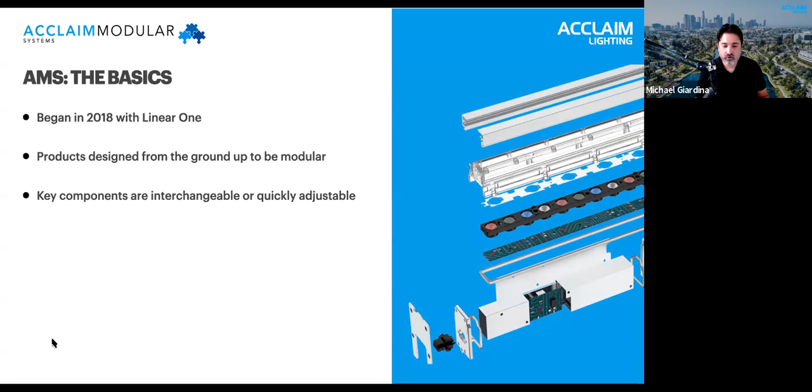The modular platform requires that key components be completely interchangeable or quickly adjustable. Any AMS fixture will have this element as one of its biggest features.

By doing this, we can offer many more product options that may not have been possible previously. These include color temperature options, optics, and mounting options. As an example, our previous linear series, Dynagraze and Cove, only had 6 beam angles in total, whereas its replacement, Linear One, has double that number of available optics.

To be clear, our primary objective with AMS is to build and ship fixtures for nearly any size project within days, not months. Since launching Linear One, we have reduced the ship time to our clients by 85% with fixtures built on the Linear One platform. So ultimately, this project is here to benefit you, the clients, and ensure we are providing the best lead time that we possibly can.

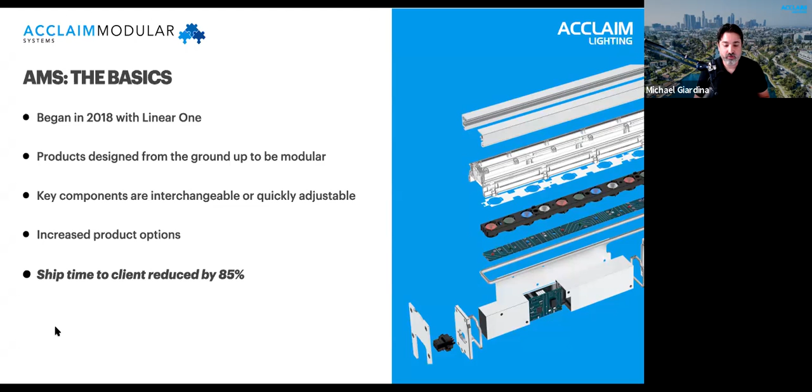I like your backdrop, Michael. Finished production live in LA, Echo Park. Right. So moving on, that was the basics.

Moving on to why modular. Why did we choose modular as the basis for this system?

The first thing we considered with AMS is how we as a company can have better control over the options and features that we offer. A key hang-up on some designs is that we may have some, but not all, of the components needed to provide all the options we want to put on a fixture.

As an example, with Linear One, there wasn't an optic available on the market that could provide all 12 of the beam angles we wanted to offer. But by making that system modular and customizable on a single optic with high transmission filters, we were able to get that done.

Next, we know everyone has different needs for the same fixture, so we want to ensure the options we offer are practical and useful in many different applications. At the end of the day, we still need to be able to sell these options, so we have to know what's popular on the market and keep an eye on what may be popular in the future.

When we build on the AMS platform, we can make those adjustments and come to market relatively quickly.

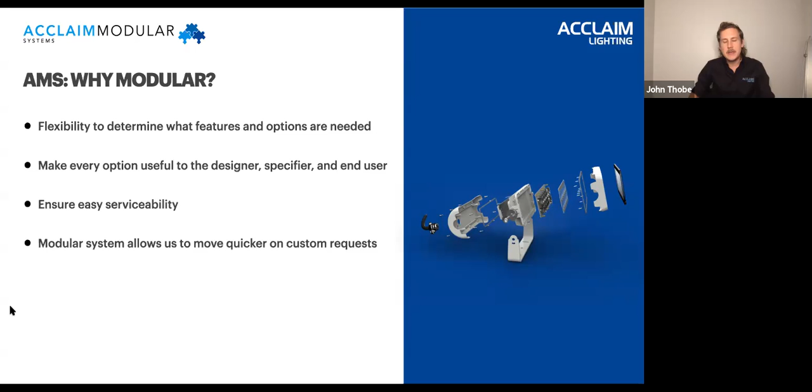Michael, wouldn't you say this is where the universal bin comes in as well, and the service component? With the modular system, we're always able to ensure a replacement fixture's LED will match what was previously shipped 3 years ago. Or we can service the module, removing the LED components and putting them on a new power supply base component. The whole idea of having the stackable assembly allows us to interchange any of the parts on a service level and on a production level.

Yeah, that's correct. What John's talking about there is our bin one feature for linear one, which means that over the lifetime of our linear one fixtures, we are only going to be using a single bin per device. So we can swap that unit out 6 months after if it needs a repair, and it'll give you the same color consistency with the units you already have on site.

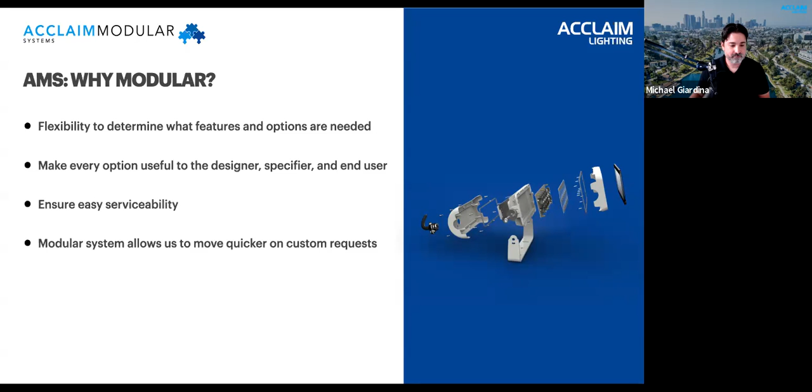That was the basis for why we switched to modular. So here's the section where we talk about how AMS actually makes things happen faster in the real world. First off, the majority of our AMS assemblies are toolless, meaning one of our techs can create it in seconds without having to fuss with too many screws or separate assemblies. This is really beneficial on the production line because they can move through it relatively quickly without needing to grab this tool and that tool as they're assembling them.

Second, as I mentioned earlier, when dealing with beam options, we use quick swap light shaping filters that provide up to 92% light transmission. These assemblies are also generally toolless for quick installation right into the light. We partner with a company here in Torrance called Luminit, and they provide most of our light shaping filters. Both of those systems make it easy for our LA assembly team to turn around orders quickly, generally within 10 days, no matter the configuration.

That is really the key here. While quick ship programs are helpful, they don't always work when you need the less popular optic or the less popular color temperature. So AMS solves this completely and makes every option available in a timely manner.

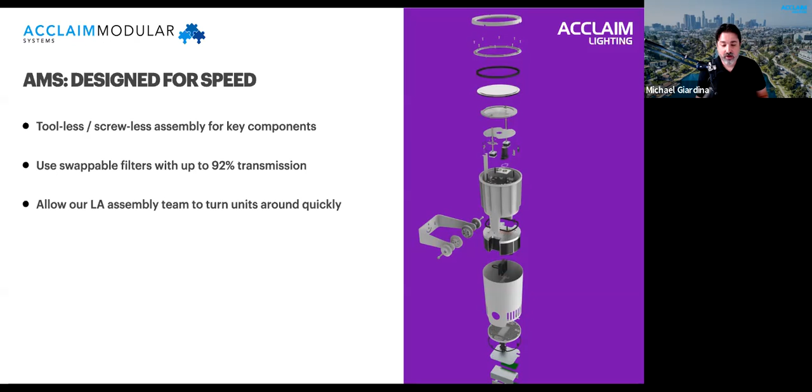In addition to these more traditional assemblies, where we are putting the component puzzle pieces together, we have been working on a new breed of AMS fixtures that have user adjustable options with everything built into a single fixture. We'll show you some of these new designs shortly, but know this type of AMS fixture can be delivered even more rapidly as it does not need to go through a traditional assembly process at all, but can provide you with all the options that you need.

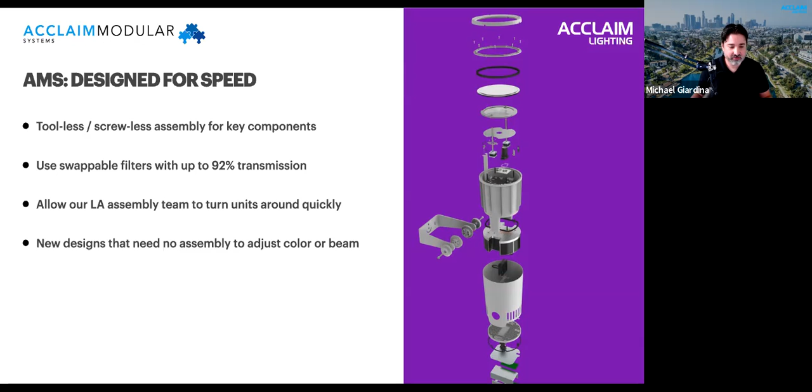So that's kind of a primer for AMS, what it is and how we can utilize it. Now we're going to go into the specific anatomy of an AMS fixture. This can vary from fixture to fixture in terms of the exact options, but note this is generally consistent as a concept for all the AMS fixtures.

So we're looking at an exploded view of linear one. First we have the core kit. The core kit is the main housing, and it includes the connections to the external cables for power and control, an internal 100 to 277 volt transformer, and in the case of linear one, 0 to 10 volt dimming circuitry. So all that is housed in the core kit, and it is the primary assembly of an AMS system.

Next, we have the color kit. Typically the color kit is going to be the LED PCB in the color temperature that you want. Now, sometimes this includes the narrow native optic already installed, but in the case of linear one, it's simply the LEDs on a custom graphite board. And that's the color kit.

And lastly, we have the optic kit. The optic kit is that high transmission light shaping filter we previously touched on. In the case of linear one, it also includes the narrow 10-degree optics that the filter sits on top of. So these three assemblies are what make up an AMS system.

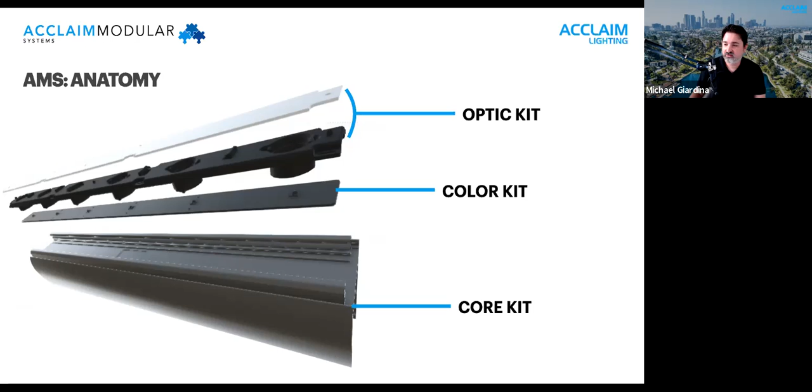Core kits, and I'm going to kick it over to John here. He can show you each of these in person. All right, so you guys can see this is the fully assembled outdoor fixture. What Michael's talking about component-wise...

This is the flexible graphite PCB. You guys can see it's actually pretty slick. Because it's graphite, it does direct heat transfer into the body of the base unit, the core kit. This is part of that toolless assembly that Mike was talking about. So all it has to be, it's held in by compression. There's none of that weird LED glue stuff on the back of the board. Again, that's how these fixtures are component interchangeable.

Here's a really good example, kind of a close-up of that optic kit. You can see we have the base collimator, kind of that traditional format for LED. And then this is the Luminit film. It is a pure holographic plastic, and that's how we do our redistribution of optics.

And it's kind of hard to get an angle there, but what it does is it's prismatic plastic, so it does a clean redistribution of the base beam angle. Again, everything kind of stacks up.

You can see these little rubber bumper pads. That's the compression that holds everything down, stacks like Legos. The top lens is fitted on, and it holds everything in place.

Same time, just so you know, with these linear fixtures, a lot of times we'll be using glare shields or louver components. If those are ordered or part of a specification, this is another great feature - they come installed on the fixtures. So when we're opening these things up, we're able to replace a traditional edge and install the glare shield, and repackage the fixture ready to be installed. No additional work needed on site.

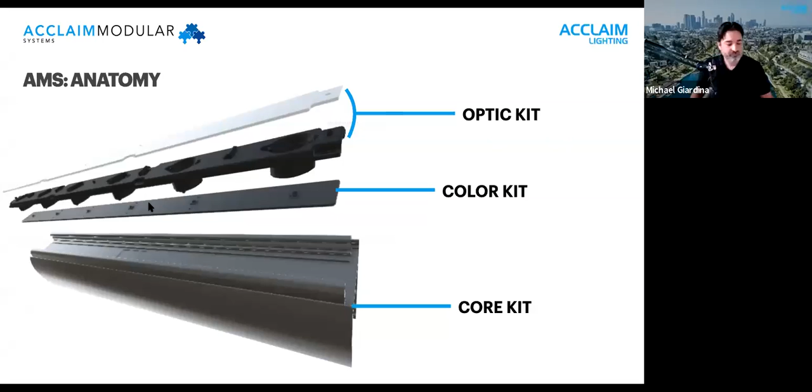Thanks, John. No problem. All right, so let's take this concept and look at it on a different fixture.

So we're looking at Flood 1, our newer compact affordable floodlight. You can see here that the core kit would be fully assembled, so nothing on the core kit needs to change here - that's the back portion of the fixture. The color kit offers 4 color temperatures, and you can see that the color kit includes the native optic as well. Sometimes the native optic is part of the color kit, sometimes it's not.

The optic kit is simply a placeholder here for the light shaping filter. You can see that as a narrow little section there. All our assembly team needs to do is slide the filter into that, and it's ready to go on top of the color kit. So you can see how the same basic AMS principles apply to these different fixture styles, from a linear fixture to a floodlight to our downlight systems. It can apply across all those.

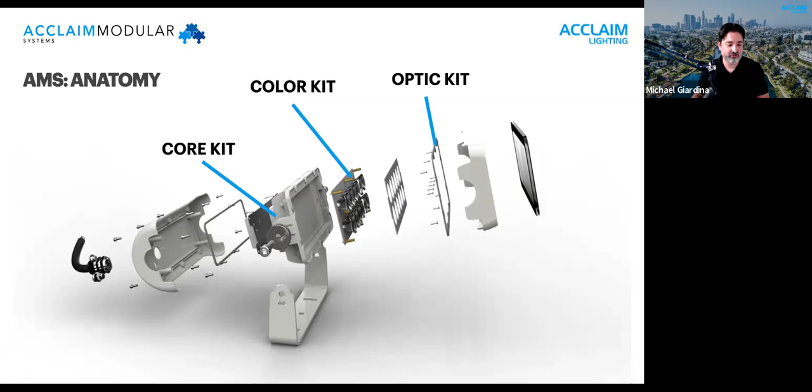So we said a toolless based AMS fixture can be assembled very quickly, and now I'd like to show you how fast that actually is. You can see this linear 1 unit can be assembled in less than a minute here. Let me get the video going.

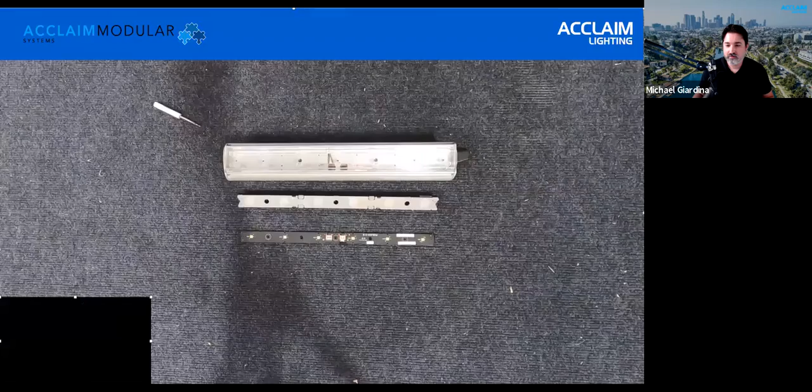That's an interior model, right, Michael? Interior model, yes.

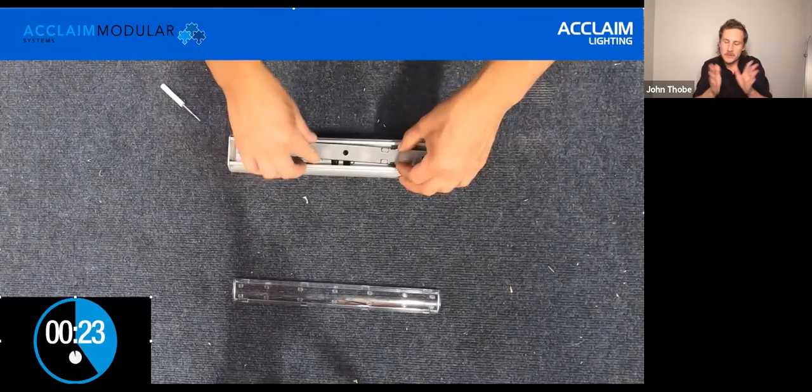I know some of the questions that come up often about this stuff is, can you change it in the field, Michael? For the interior fixture, say if I didn't like the optic that I bought, and needed something narrower, or had some striation off the LED board and wanted something a little softer - what would be the process of getting that adjusted? I would say consult our support team for that on a case-by-case basis, but technically it should be doable. I'd suggest getting our support team involved just to make sure they're doing it right.

Okay, yeah, there are instructions. My feeling on this is if it's interior, we're not dealing with any weather seals. You can see in the video, that was done in 40, 45 seconds, where the lens is physically popped off and just held via compression clip-in base on the base of the fixture.

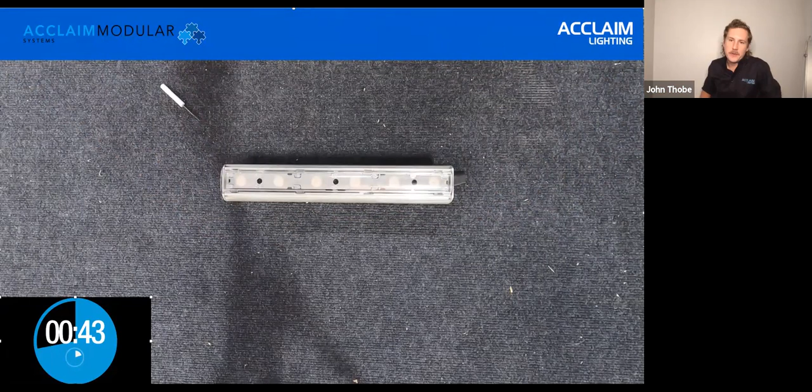Right, and definitely the interior version is best case scenario here. With the exterior version, we have a couple of different screws involved as well to make sure that the IP66 rating is intact, so that does take a little longer, but it's more about showing you literally how fast we can do the assembly with these systems. Special thank you to Jerry on our team for being the hand model on that video.

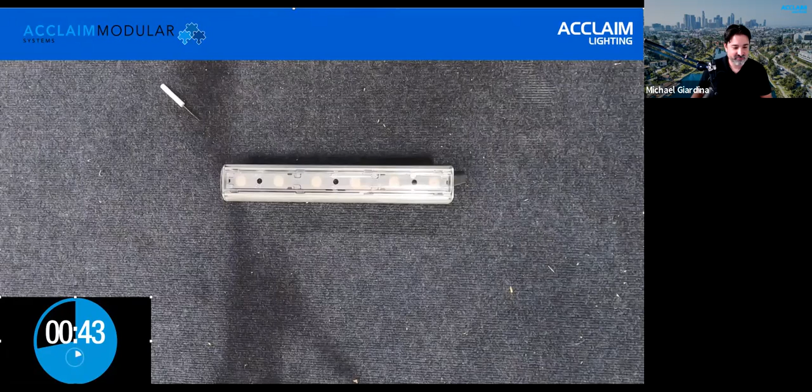So one other thing I want to show you - we've talked a lot about options, but I want to show you how you can see all the available options for a fixture and build a custom spec sheet on our website. If you go to any product page on our website, you'll go down to the configure your product section.

So you can note up the top left is the order code with some hashtags there for the blank areas. You can select your version - this is the 12 watt per foot version. Select your length in a linear fixture, 1 foot or 4 foot. Select your LED color, 80 CRI, 3500K, and move over one more, and you've got all your optic options. Select the one you want. Now if you notice back on the top left, you've got the order code filled in. You can either copy that to the clipboard or generate a custom spec sheet, filling in a little bit of information about the project.

And that is all optional, by the way. You don't have to fill in that information. Then click generate, and you'll get a custom PDF with all the information on the project you filled in. If you scroll to the specification area with the order code, it fills in the information for the exact fixture you're looking for. That's an easy way to view the options for a product and create a custom spec sheet as you need it on our website, available for all fixtures that have options like that.

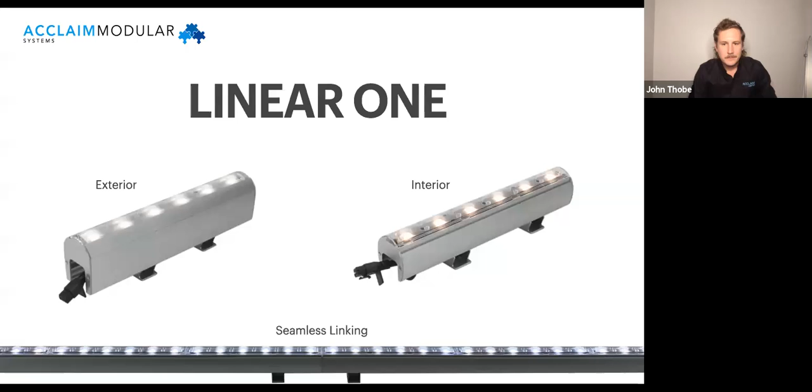Linear One offers 10 static colors with an 80 or 90 CRI. We recently launched some warmer colors, 2100K and 2400K, for the hospitality markets. You can also get a few static colors like red, green, blue, or amber. We have 12 different optics to cover any linear application, including asymmetric and batwing.

The dimming is also class leading, down to 1% via 0 to 10 volt. All the way down to 1% there - this dimmer clicks off, and you can see it clicks right back onto the base. So you get a really nice, clean dimming curve on 0 to 10 with this fixture.

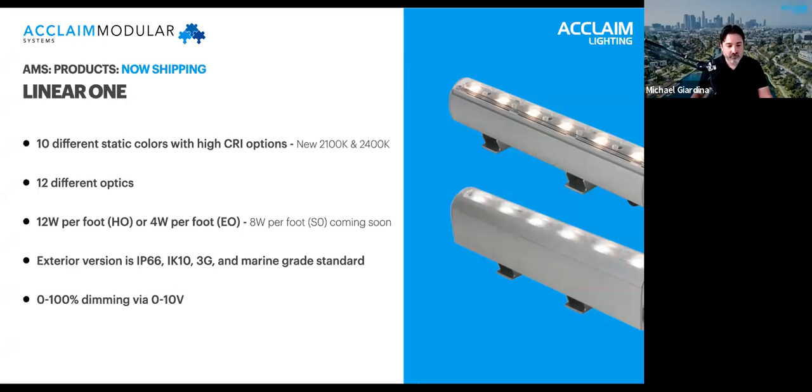All right, so that's the basis of our white light Linear One. Now what we'd like to talk about, and we're very excited to show you, is the newest part of the Linear One line: Linear One DMX. Linear One DMX, which will be coming out in the third quarter, will bring all the advantages of the AMS platform to color changing and dynamic white fixtures.

We will offer RGBW with 3 options on white: a 3000K RGBW, a 4000K RGBW, and a 5700K RGBW. It will also include a dynamic white option that will operate from 2400K to 5700K, with 10 linear optics, all similar in performance to the white LED Linear One version, and we're up to 600 lumens per foot. So all the same durability and benefits of Linear One, but with the DMX version.

This will be kind of taking the place of our Dyna Graze DMX series in our line, but because we're adding that modularity, we think we're going to do really well with this product, and everyone's going to be excited about seeing it.

So John has a unit there. In general, I think of this as a first of its kind variety - we're launching quick ship, high performance color changing linear. As Michael mentioned, you could specify 3 different formats of RGBW: the 3K, the 4K, or the cool white, an RGBA, or a dynamic white. So that's 5 different chipsets that we offer as standard, plus 10 different optics.

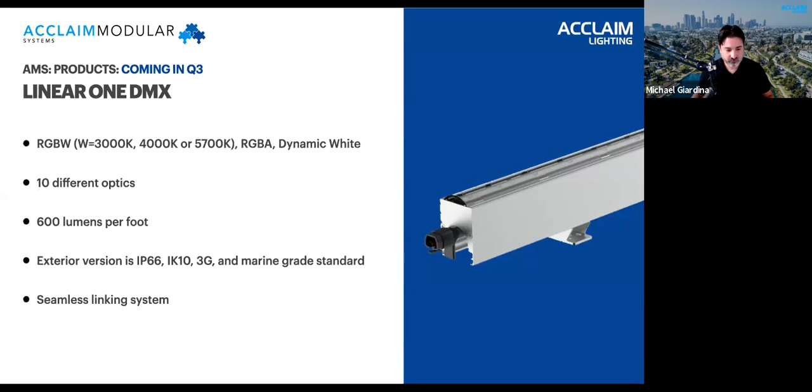So that's Linear One DMX. Moving on to our floodlights on AMS. Introduced last year, Flood One EO is a compact, affordable LED floodlight. It's the first floodlight built on the AMS platform. It features 4 static color white temperatures and 6 different optics, giving up to 80 feet of throw in its most narrow optic. It bests the DynaFlood HO, which is the unit it's replacing, with 25% more output. It features better durability, including an IP66 rating and 3G vibration for bridge applications.

Awesome, I've got the fixture here - again, you can see that's the narrow 10-degree beam. Great thing about this fixture, for just a simple traditional white floodlight, is it's operating on 2 wires 0 to 10, so we got a really nice dimming curve down to about 5%. Great performance with twist and lock adjustable aiming. And again, with the modular system, any color temperature, multiple CRIs, all the beam angles - there's no real lead time for this fixture. We're stocking the core kits and components here, ready to assemble and ship.

Bam. And you can see this is a bright light, really punchy.

Absolutely. So again, expanding on taking these fixtures that we've introduced first with AMS in white light and bringing them over to color, we are also happy to introduce Flood One EO Color. We wanted to show all these products to you at the most recent trade shows - obviously we didn't get a chance to do that. So we're showing them to you as best we can here, but we do look forward to showing them to you in person the next time we get a chance.

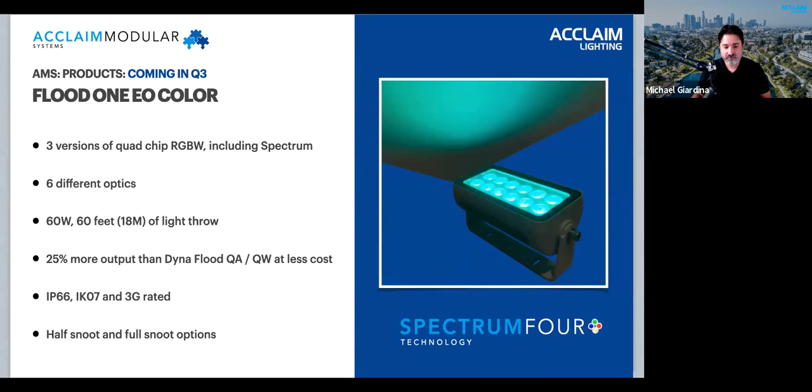Taking the Flood One EO concept and completing the series is Flood One EO Color. It will offer 3 quad color configurations, including the Spectrum 4, which provides better dedicated whites as well as a wider color palette. The quad color system, as you can tell from the photo, provides color mixing in a single die, which eliminates the striation and unwanted shadowing when mixing 2 or more colors together. We've had this on products for a while - our Dynadrum series in quad does this - and it's just a much better system for color mixing.

You guys can see it, just switch here real quick. I've got the fixture doing a magenta tonality. I mean, this thing is right on the wall.

You cannot see a red diode, blue diode, or any color variation. We are mixing right on the chip, right at the source, taking the technology we've offered in larger, higher performance fixtures and narrowing it back into a simple color changing floodlight where we can do all the colors built into one. Make it go white, looks like a white light. For Christmas time, we can do holidays at the ready.

So Flood 1, the white version we talked about, had about 80 feet of throw in its narrow optic. This color version can get you about 60 feet of throw in a very compact package, with all the same durability features that the standard Flood 1 EO has.

This product is the successor to our very popular Dynaflood QA/QW fixture. We expect it to make its mark by offering 25% more output than the Flood QA/QW, and it's going to come in at a lower price point. So we're really hitting 2 birds with 1 stone there.

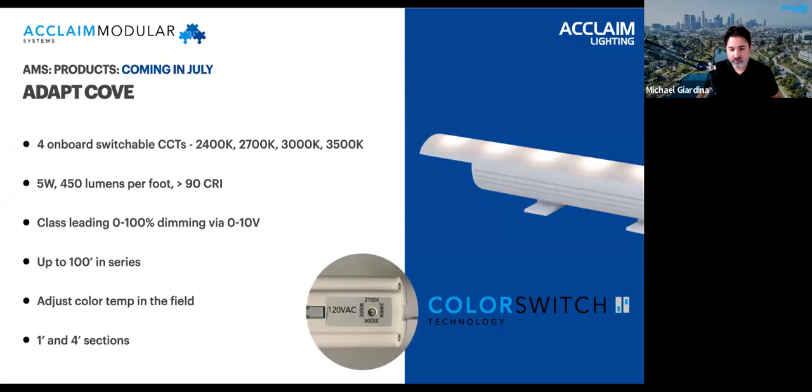Moving on to one other new product that we are introducing. This one's due out later this year, but it features 2 new technologies from Acclaim.

First, let me introduce you to what Spectrum 6 technology is. Spectrum 6 takes our concept of better white light and color changing products to a new level. While our current Spectrum 4 products do an excellent job at providing good dedicated whites, it tops out at about 80 CRI with the RGBW chip.

With Spectrum 6, we combine 6 separate colors in a single array to provide an unlimited number of whites from 1800 to 5800K at 90 CRI and 90 TM30 - that's a minimum 90. It also does color changing, using red, green, blue, amber, cyan, and lime together to offer those full spectrum light options. So essentially what you're getting here is really usable dedicated whites, full color mixing, and full dynamic white options.

The other technology used in this new fixture is called beam shift. It's an automated or manually controlled zoom system. It frees us up from swapping out filters or worrying about specifying the wrong beam angle, because you can adjust it right there on site.

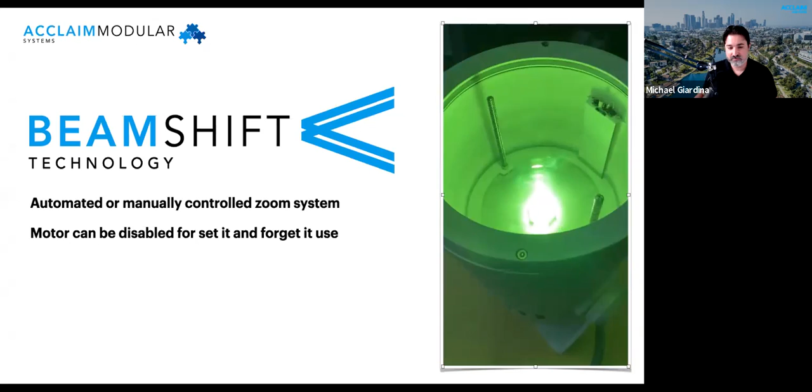The fixture that is using these 2 new technologies, we call Unity. And we're thrilled to give you a first look at this fixture that incorporates both of them. Unity uses the Spectrum 6 engine to create a single, fully homogenized beam. That means no separate colors, not even separate LED diodes on the front of the fixture. You get that incredible palette of color, including 9 quick select dedicated whites at 90 CRI, full dynamic white operation, and full color mixing operation.

The beam shift system gives you a range from 10 degrees to 40 degrees with just the push of a button, and ARIA wireless is built into every unit. Output in color changing is similar to our Dynadrum SO series, but when using dedicated whites, it's on par with our high output HO series. ARIA wireless is standard on each unit. We are excited to launch Unity later this year.

John has one there, he can give you a quick preview. Here it is, guys. It's big, it's heavy, it's outdoor rated, but it's cool.

So these are the 6 individual colors. We've got a red, green, blue, amber, cyan, and lime. Now this is really slick - this is the variable white format. So I'm going to try to shine it against the wall here where I go through the different color zones.